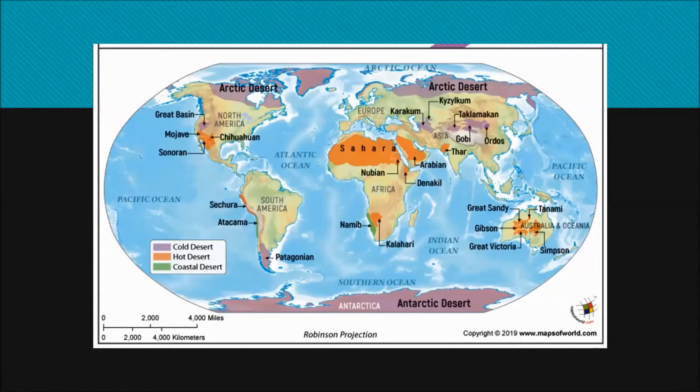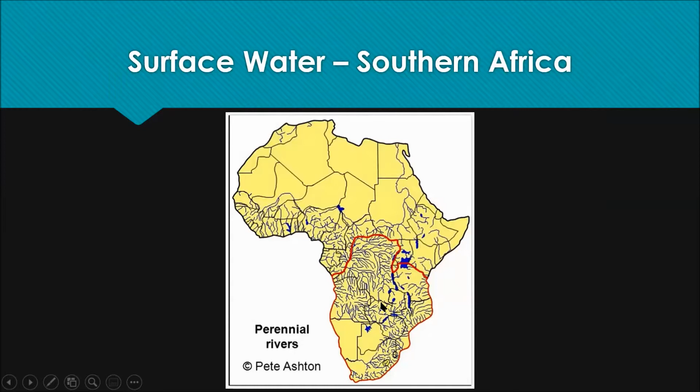Moving on to surface water, it's not surprising that despite Central Africa and much of East Africa being fraught with surface water, if you move to the west, Namibia is a blank spot with literally no perennial rivers inside its borders. If you zoom in to the city of Windhoek, roughly in the middle of the country, you find it's at the furthest possible spot from any available surface water.

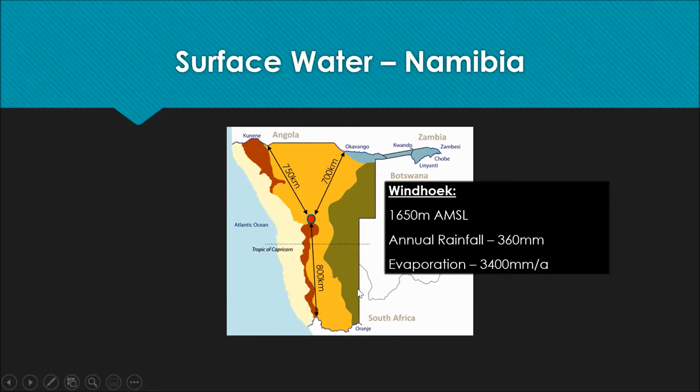So you have the Kunene River in the north on the border with Angola, the Okavango River shared between Namibia, Angola, and Zambia, and some other rivers further along, and then the Orange River in the south, shared with South Africa. That's just to put it a bit into context. So water supply in Namibia, and Windhoek particularly, is very, very challenging.

So if we go back in history to see why they considered direct potable reuse at that stage, this should tell you the story. It's called the post-World War II population explosion. In simple terms, the population of Windhoek was almost flatline, slowly growing, until around 1946. It really started rapidly expanding because of the establishment of government services in Windhoek and the decision to make it the administrative capital of the then Southwest Africa. That led to immense population growth, and soon they ran out of water sources.

By 1957, there was a period where they had to practice water rationing. As far as we know, it was the only time the capital city ever ran out of water and had to ration the people. That led to a crisis which was then taken up at government level.

As is usually the case, the government established a commission, the Executive Commission, to look into it. Their job was pretty simple: to see what the demand was at the moment and in the foreseeable future, review the available sources, and then investigate what additional sources they could bring online to solve the problem. And then, as with all government reports, it ends with how much that will cost.

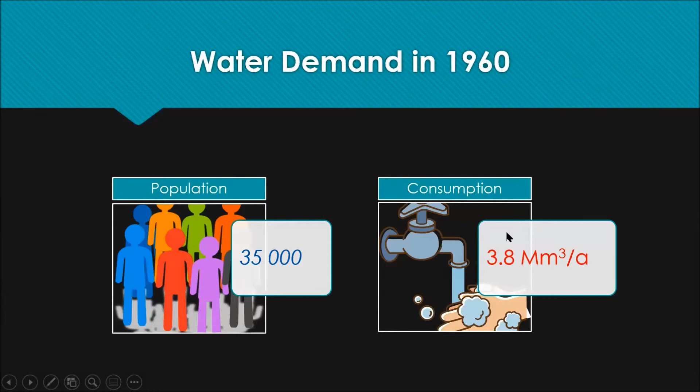So if you look at the situation then, they had about 35,000 people and needed about 4 million cubic meters per annum. What they had were three sources: two smallish dams, with capacities of 2.4 and 3.6, and the Goreangab Dam, which was just completed, brand new in 1959.

But the majority of the water was coming from the Windhoek Aquifer, from boreholes that they had drilled. The yield of the dams was 0.4 million, and the Goreangab Dam gave 0.8 to 1 million, totaling 1.4 million. What they needed was 3.8 million. So the surplus, or the bulk of it, came from the Windhoek Aquifer, even though the safe yield at that stage was estimated at about 1.6 million cubic meters. So they were massively overdrawing on the Windhoek Aquifer already at that stage.

So they looked at a number of options, and this is what the Executive Commission presented, also recognizing that the boreholes were already sorely overtaxed - a quote from the Executive Commission findings report. Options included water loss control, obviously an obvious one, and maximizing the use of the Avis Dam, likely because it's upstream of the town so they could gravitate water from there. They were also proposing an additional dam downstream of the Goreangab Dam, called the Gammams 3 Dam scheme.

And then they proposed the Swakop Dam, which would have been a state supply scheme some 70 kilometers north of Windhoek. And last but not least, an option proposed by the City Council of Windhoek: they were fairly confident that they could reuse treated sewage water and supply up to a third of the potable demand of the city.

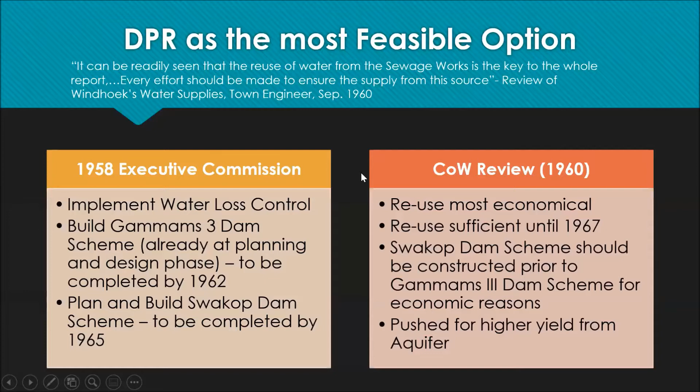So it was agreed, towards the end of 1960, that they would pursue direct potable reuse. Just a few comments on the early days.

They then brought in the Council for Scientific and Industrial Research, the CSIR in South Africa, who they had under contract in the early days to develop the scheme. They signed a new contract with a more focused approach, and did extensive pilot studies both here and in South Africa between 1962 and 1965.

That led to the design of the first full-scale plant, producing about 5,000 cubic meters per day, or 1.6 million cubic meters per annum.

Production then started in October 1968, and as you can see, it was just in time for another dry spell, because within the first year they managed to produce a quarter of the total supply to the town from this reuse plant.

The Swakop Dam scheme, interestingly, was only completed and started producing water about 5 to 6 years later. So this really gave them time to complete that bigger capital project and also justify the cost in terms of the number of users.

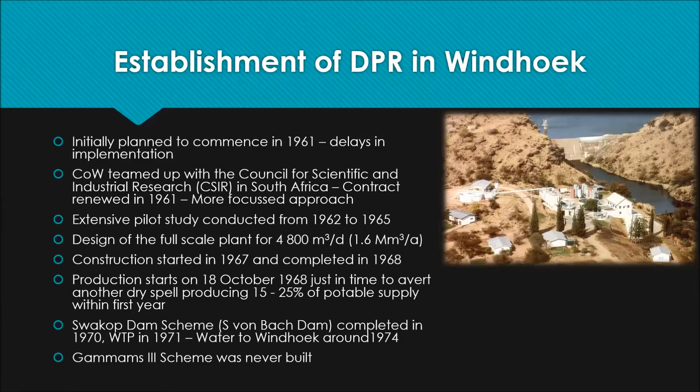The other interesting fact is that the Gammams 3 Dam scheme, which was actually the primary proposal from the government side, was never built - even up to this day.

Just some comments on the early days of DPR in Windhoek. Interestingly, the government was very hesitant to declare the Windhoek DPR plant as a normal supply source. It was only declassified as a research facility in 1982, which was 14 years after the initial supply started. They did keep a testing facility in Pretoria, South Africa.

It was called the Stander plant. During the first life of the Windhoek plant, they kept doing tests and improvements at the Stander plant, which after testing was then implemented in Windhoek as permanent solutions.

Also during that time, interesting to note, it shows maybe the distrust in the solution. Four different independent laboratories, two in Namibia and two in South Africa, were involved in monitoring the effluent from the plant to ensure compliance with the set standards.

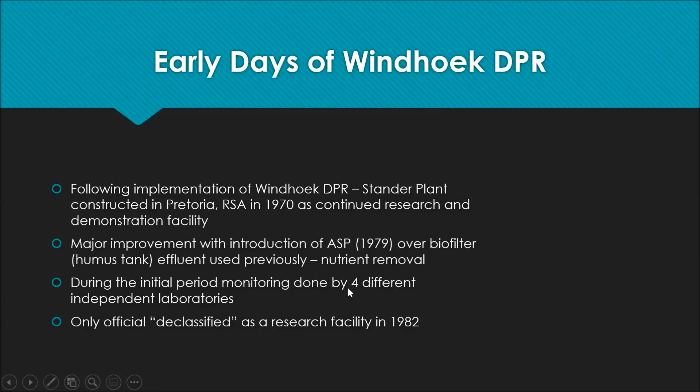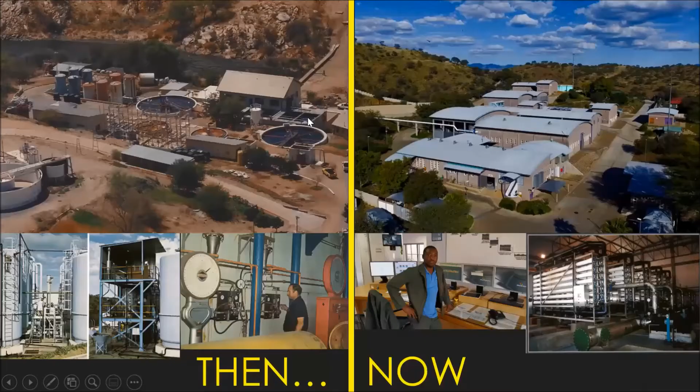Just some pictures on the left. You can see this is what the initial plant looked like. You can kind of see that they adjusted the old plant to meet the DPR requirements. On the right-hand side, you see the purpose-built new plant, which is not so new anymore - it's about 20 years old at the moment. But this is what it looks like, more modern with centralized automated control and including membranes and so forth, which was technology not available in the 1960s.

Just quickly on the process train - I don't know how many participants are technically inclined, but I'll quickly run through the process. So what you have is raw water blending. As I said, there were two sources: the Goreangab Dam and the sewage treatment plant. The Goreangab Dam in the last 20 years of the new plant was almost never used. So for the last at least 18 years, we have been using exclusively treated sewage water.

The first step is pre-ozonation, just to destabilize some of the organic material, and then also the introduction of ferric chloride, which is the main contributor to the next step of dissolved air flotation. After dissolved air flotation, there's chemical stabilization for the pH, followed by normal sand filtration. After sand filtration is really the main chemical treatment step, which is ozonation. After ozonation, there's removal of the residual ozone, because you're followed by a biological step - a BAC, biological activated carbon filtration, followed by GAC, granular activated carbon. Then the last step is ultrafiltration in the membranes, and then just normal water stabilization before supply to the town's residents.

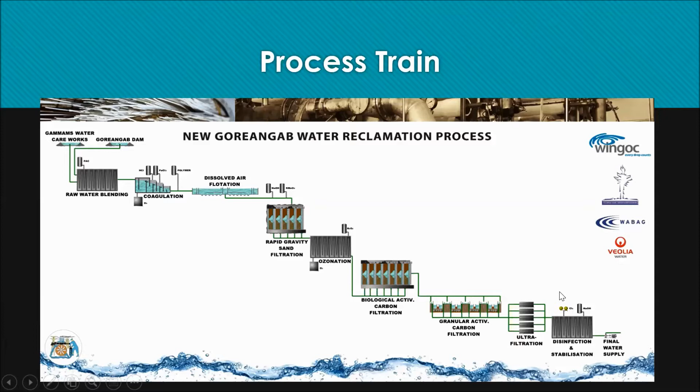Just some principles - I want to spend a few moments here. The first principle, and I would say the fundamental basis of the DPR in Windhoek, is that we only use wastewater from domestic origin. In the town, the drainage areas for industrial and domestic have been separated, with industrial draining to a separate plant. The water that goes to the plant that supplies the DPR option is purely domestic.

Then the monitoring is quite important. We call it whole cycle monitoring. It means that you monitor the whole cycle from the point of discharge, where somebody discharges wastewater into the sewer, back again to the point where you supply to that same site the treated water. You have to know what's happening in that entire cycle in order to really control the process. Effective biological treatment means your wastewater treatment has to be up to standard, because a consistent supply from there in terms of water quality is very important for the reuse process.

The multiple barrier treatment, I think, is well known in the DPR world today. It's just that there is more than one process that actually takes care of a specifically identified contaminant. Blending of the final effluent is something brought about due to the fact that we use direct pipe-to-pipe reuse. In an indirect process, you would have blended back into a natural source or a river where there would have been some dilution. Because we are not doing that, we take a one-third to two-thirds proportional dilution from surface water, from rainwater, from the surface water dams. So that's also quite an important cornerstone of the process.

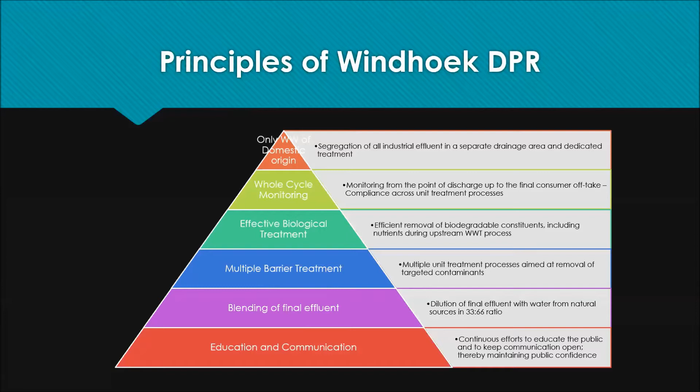And then last but not least is ongoing education and communication to the users. People need to know what you are doing, and they need to have trust in what you are doing. So you don't just win the trust once off. That leads us to sort of the public acceptance - how was it that people were accepting the fact that they were drinking their own treated sewage?

At the media conference, he was standing with a glass of water with the reporters. When asked why he kept referring to the glass but hadn't been seen drinking from it, he said, as a good politician would, to be honest with you, I already had my glass. He also mentioned they had a testing panel where people tested the water, and one sample was from the reuse plant. He said three-quarters of people actually preferred the treated sewage as the better tasting water. I don't know if that's true, but that was one of the motivations he gave in his speech.

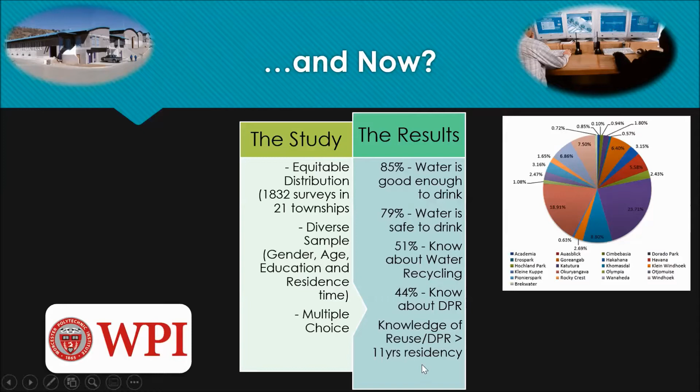It dropped a little bit from 85 to 79, but still the majority felt it was safe. But when asked if they knew that a third of their water actually comes from treated sewage water, it dropped to 50%. This shows that continuous public education is necessary, because people might know about it during a drought or when the solution is introduced, but many years later, people don't know. The study found that people who had a residency of 11 years or more at that time knew about the source of the water, but younger people, and people who hadn't gone through a drought—since 11 years was the time to the last drought—don't actually know.

So just some financial considerations. I don't know how I'm doing on time.

We are planning a new plant to be completed in the next 4 or 5 years. We're only at the pre-feasibility stage now, but we have done cost estimates based on what they did in Cape Town, because Cape Town is also currently looking at DPR options. The indications are that you're currently looking at just under $2 million per megaliter, so just to give you an indication of what current cost would be.

The OPEX, I took the operational cost of last year, the year 2020, and that was just under 5 million. That translated into about 90 US dollar cents per cubic meter. That's the price at which the water was sold to the public.

This cost obviously includes consumables and maintenance. There's quite a bit of reinvestment in the membranes, which have to be replaced in total, I think once every 7 years contractually. It also includes quite a lot of money going towards monitoring and research, because this plant, even though it's 20 years old, we are doing continuous research, because the world of science is evolving, and what people can measure becomes more and more, and also the level at which people can measure it.

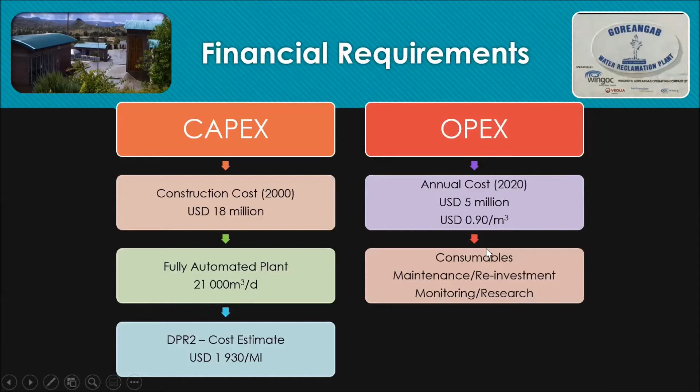Before it was okay if something was below 1 milligram per liter, but now you're looking at nanograms per liter, etc. So we have to continuously make sure that the plant meets all the new standards and all the new contaminants that are being identified as being of concern. There is an ongoing responsibility on anybody who implements such a solution to keep track of what's happening in the world of science.

Just as a last bit, what is the impact of this plant? How important is it to us as a city council? What you can see here is the water demand forecast that was done in 2012-13, and at the current rate, we were exceeding the available supply that we had.

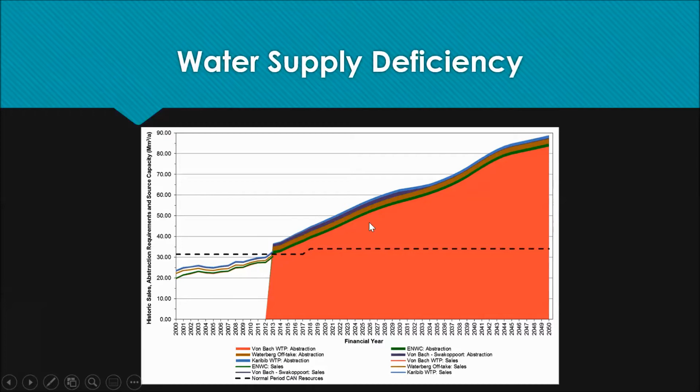What you see here was an upgrade to the plant, or actually a rectification of a problem we had, to try and get more water. But we were exceeding the available supply.

The options that we could identify at that time were long-term: taking water from the Okavango River, as I said previously, 700 kilometers away, or going for desalination at the coast, which is also about 350 kilometers away, but also more importantly, 2,000 meters lower down at sea level. These options were not going to be implemented in the foreseeable future, or at least 10 years to develop. So the city developed a water supply strategy, and the core of that was around reuse, both potable and non-potable.

Then we hit the drought in 2016. Before the drought, we had access to surface water, so 76%, or 3/4, of the water that we had came from surface water. We had to replace most of that as the dams nearly ran dry. 2 of the 3 main supply dams actually went dry.

So we had to up the DPR, and we had the option to double it at the time to about 30%. Since then, the DPR has been supplying the city with about a third, and that's how important it was. The rest was made up from groundwater on a temporary basis. If we didn't have the DPR option as a supply, we would have definitely had trouble, because there was a limit to what we could supply from the other sources. The actual surface water went down to just 3%.

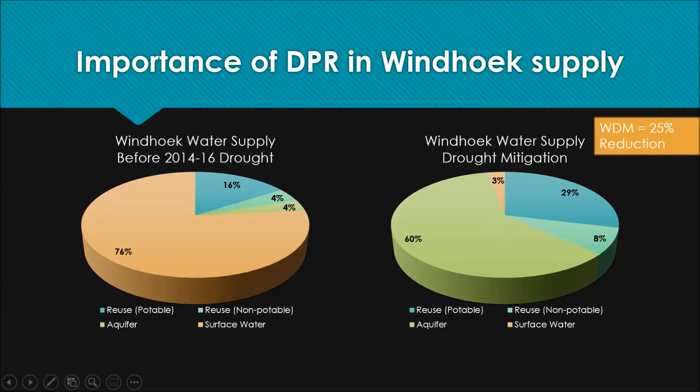So I think that's it from my side, Andre. Yeah, I hope it was fast enough and not too fast. Thank you very much.

Okay, thank you, Andre. Hello, everyone. My name is Sydney, as Andre has mentioned. It gives me great pleasure to introduce eThekwini to you guys and the projects that we're working on.

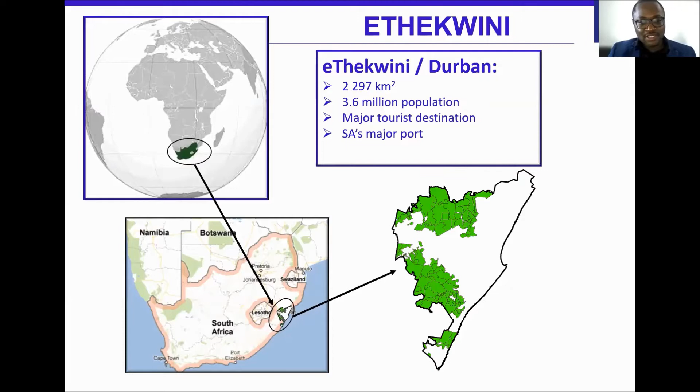Just to give you a brief background of the eThekwini municipality: it basically governs the city of Durban and the surrounding towns. According to the last census, we have a population of about 3.6 million people, increasing every year by about 1.5% per annum. We are a major port destination, one of the largest in Africa.

In terms of eThekwini Water and Sanitation, we supply about 963 megaliters a day from 9 treatment works. Those 9 treatment works are owned by our bulk water supplier, Umgeni Water, which supplies to us, and then we buy the bulk from the treatment works. We then reticulate it through our system, which has about 14,000 kilometers worth of water mains and a number of reservoirs. From that 963, we treat about 500 megaliters a day of wastewater from our 27 treatment works.

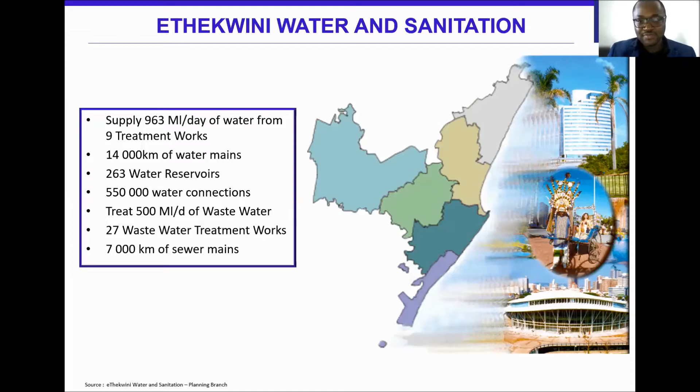So to give you perspective on the supply zones for eThekwini: eThekwini purchases its water from Umgeni Water, our main bulk supplier, who supply us from 3 main water supply systems. The biggest is the Mgeni water supply system, which has a number of dams. We're quite blessed in this region, with a number of rivers coming into the area, and this is the important one I'll be talking about, the central Mgeni system. The other systems in the north are still being developed, supporting smaller towns, including those in the south, but the major one is the Mgeni water supply system.

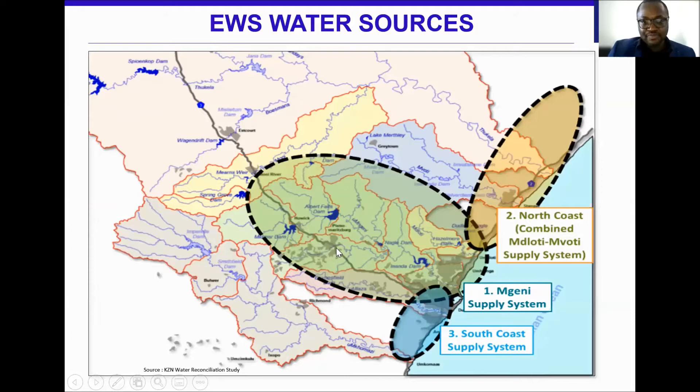So the National Department of Water and Sanitation proposed the Smithfield Dam to mitigate against that shortfall. That feasibility study was completed around 2012, 2013. The cost of it was quite considerable — nearly $2 billion in today's money.

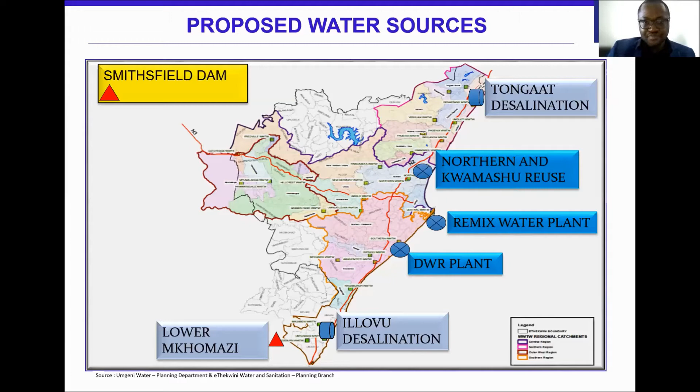So I'll briefly talk about these three main projects as well as our smaller supporting project. The first one was the Northern Works water reuse plant, for which we did a PPP feasibility study. This plant is located in the north of Durban, and we treat about 70 megaliters of wastewater in this treatment works. We envisage that we will treat the effluent and also supply industry in the area.

As you can see, NCP Alcohols is one of the industry players interested in taking the effluent, along with some of the golf courses and other users.

So the interesting part of this project is that we are also considering direct potable reuse in this area. However, this project started around 2014, but we had resistance from the public, particularly in this area, for religious reasons -- they didn't want to drink the water reuse water, and there was no public trust for the municipality undertaking such a project.

But that sentiment has since changed when the drought hit. We saw it in our other projects when we did public participation, where residents were actually encouraging the city to pursue this project because they said, look, there's a water shortage in the city and we need to do something about it. It's either no water or some water, so the idea of water reuse was supported going forward.

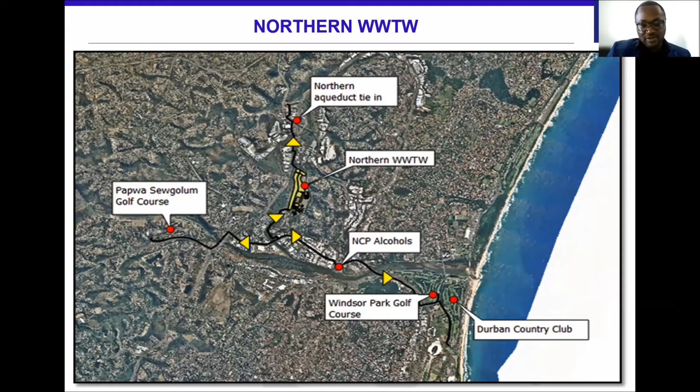So our other project was the Kwamashu Treatment Works. It's also slightly north of the project I spoke about. That will tie into our existing Northern Aqueduct, which supplies residents in the city of Durban.

But before we proceed with that bigger project, we thought let's pilot water reuse to get more support from the public and from the politicians, because it's very important to prove the concept to the public that it's safe to drink -- here are the results.

So we partnered with the Durban University of Technology to test some of the water, and CSIR as well. They'll be testing the effluent produced from this pilot plant at Kwamashu Treatment Works, to test reuse and a new wastewater treatment system called MABR, which is sort of an innovative one -- but that's a presentation on its own.

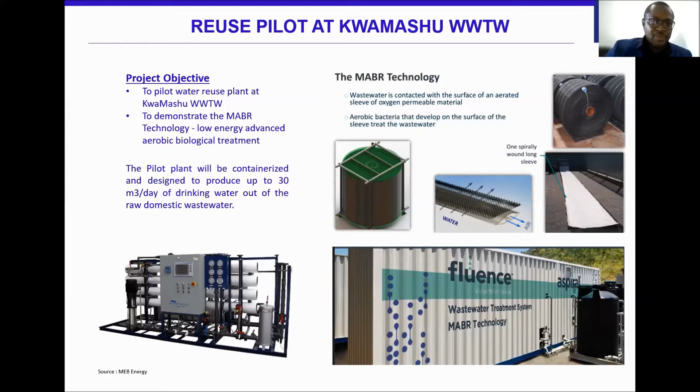The other project we were pursuing was stormwater and effluent reuse at our Umbilo treatment works. This is still at feasibility study stage, where there are a number of options -- we could inject directly back into the aquifer, or direct that effluent to a nearby water treatment plant. So that's still in the pre-feasibility stage. We're pursuing this as a PPP project, which requires a PPP feasibility study to be done.

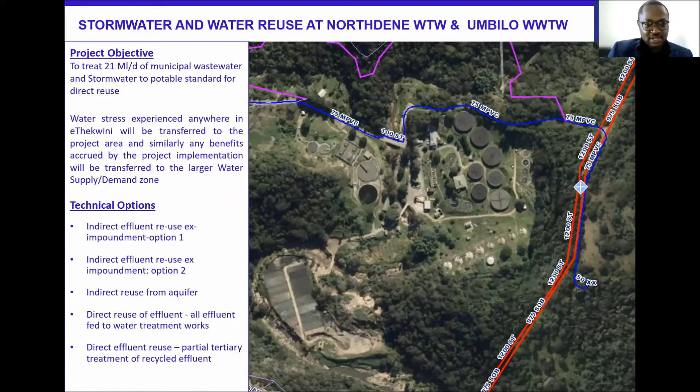As Andre mentioned in my introduction earlier, we have an existing plant called the Durban Water Recycling Plant. It was our first water reuse plant in the city of Durban, treating about 47.5 megaliters a day of treated effluent. This plant was commissioned in 2001.

So the main purpose of that plant was to supply industries in the south of Durban, near the old Durban International Airport where the industries were located. It was sited at our Southern Treatment Works, which is our biggest wastewater treatment works with a capacity of 230 megaliters a day. Veolia was appointed as a concessionaire to operate this plant.

We mainly supplied Mondi, a paper manufacturing company, and Sapref, an oil refinery. It was pretty successful, with no major outages and great water supply. We managed to supply 97% of the time to the industries, because we have a backup just in case we can't supply them with treated effluents, where they would tap off potable water from our normal mains.

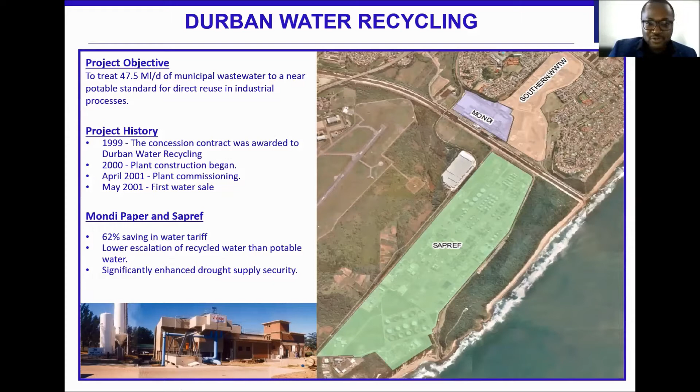In the past, we did consider desalination, but the challenges for us to pursue it were the high electricity consumption and the brine discharge, because there were concerns about the impacts of discharging high saline water back into the receiving water. The main concern was electricity consumption, since South Africa is having an energy crisis, and plugging in desalination plants would just worsen the situation.

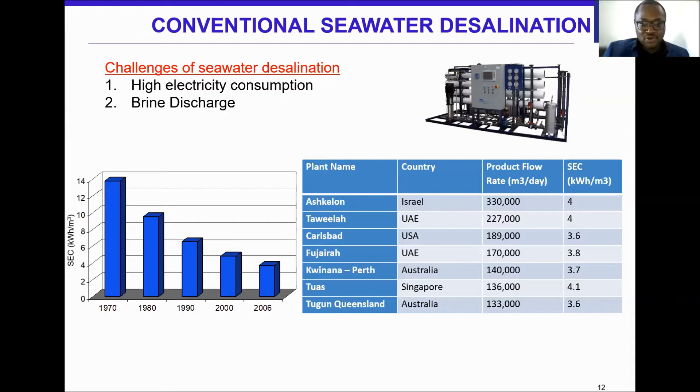So we couldn't really pursue desalination for those reasons, and the OPEX was a bit too high for us as a city. So we were approached by the Japanese government to implement a form of desalination - basically a mixture of treated sewage and desalination, where we take rejects from the BWRO, the brackish reverse osmosis, and use them to dilute the seawater.

By doing that, you're reducing the osmotic pressure, so your pressure pumps are spec'd lower. Because of the dilution effect, the brine you take out is about the same as you're taking in. So the attractive thing about this technology is that power consumption is considerably lower than normal desalination plants - normal desalination is about 3.8 kilowatt hours per cubic meter, while with this technology, maximum yield you'll see is about 2.6.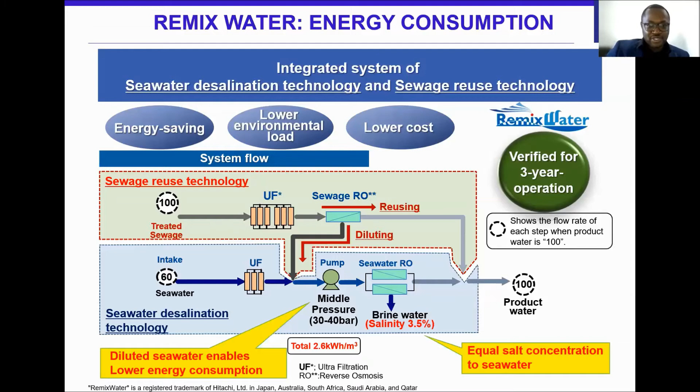This project was brought to us in about 2013 and introduced to the city. In 2016, we signed an MOU with NEDO, the public organization of the Japanese government, for them to fund a demonstration plant in the city of Durban to prove the concept of the technology.

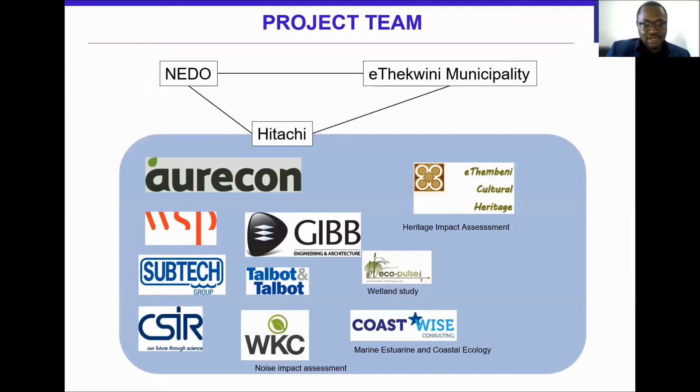It was for us to construct a 6.25 megaliter plant in the city of Durban and demonstrate it for a period of 12 months, to see if the technology is attractive and if the water quality produced is actually great for us. NEDO then appointed Hitachi to pursue this project, and a 3-party agreement was signed between these companies.

The harbor also has great water quality. I know the City of Cape Town in the past tried to implement desalination in the harbor, and there were issues with fuel oils from ships and other contaminants. But CSIR actually monitored the water quality for a period of 2 years and we saw that it's great - we even eliminated one of the units in the demonstration plant, the DAF, dissolved air flotation unit.

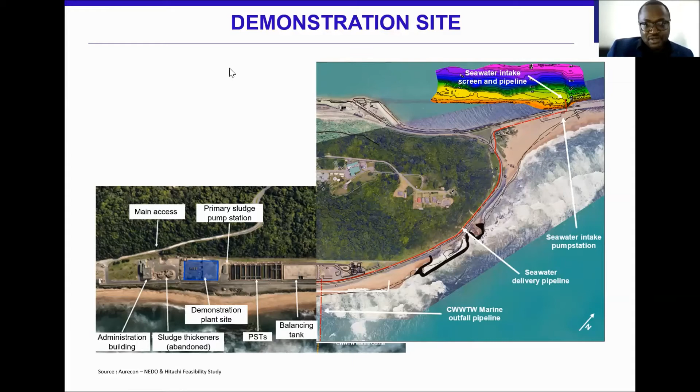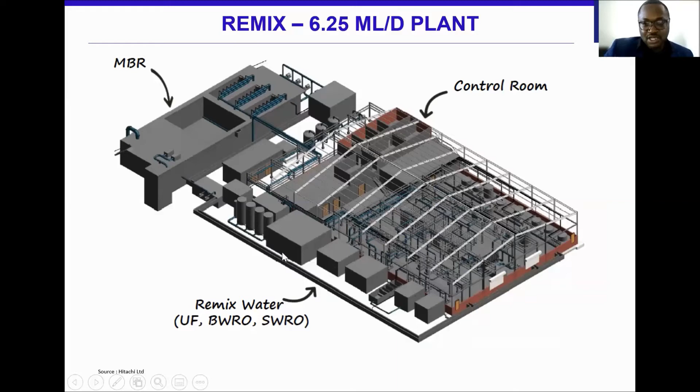So in terms of the project timeline, the plant was fully commissioned in about February 2020. But because of COVID regulations, we actually had to shut down the plant for quite a number of months because South Africa entered into severe lockdown restrictions, so we had to leave the site. However, the plant is busy being recommissioned at the moment. It should be fully commissioned in a month's time, and they will proceed with that demonstration period with the new revised timelines.

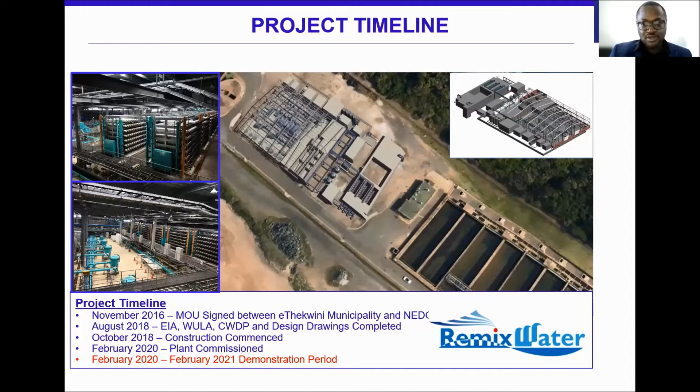So part of the larger projects we're looking at is the standards for water reuse. I'm sure, like my previous speaker mentioned, there are new emerging contaminants being found in our catchments. And then how do we detect and mitigate against those risks posed by contaminants like pharmaceuticals, viruses and pathogens present in the wastewater, and how do we remove them?

So that's when we partnered again with DUT and CSIR, who are assisting us currently with monitoring our catchments in the area. All of those different treatment works have different catchments, and hospitals and everything feeding into those treatment plants. We're actually monitoring the levels of these CECs in the wastewater, so that when some of our treatment plants are online, we can see the removal efficiency of those technologies, because it's different technologies on different sites.

And part of that study is also to revise the water quality standards ourselves, because the South African standards at the moment don't take into account water reuse. It's basically just raw water, freshwater abstraction, and that's about it. So it doesn't look in detail at the emerging contaminants of concern. Part of it is just to develop that new guideline for us to implement properly in our projects, and hopefully at national level it will be considered as well.

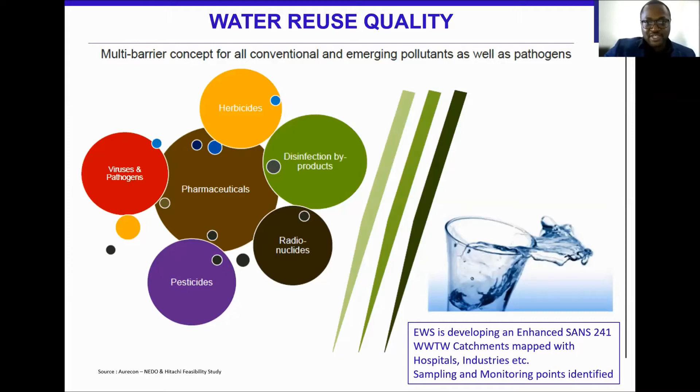So yeah, I think that wraps up my presentation. I think questions will take it from here. Thanks.

Thank you so much, Sydney. It is my feeling that at least southern Mozambique, or Maputo at least, has a lot to learn. It's not exactly Windhoek and it's not exactly Durban, but it has a lot to learn from both cases.

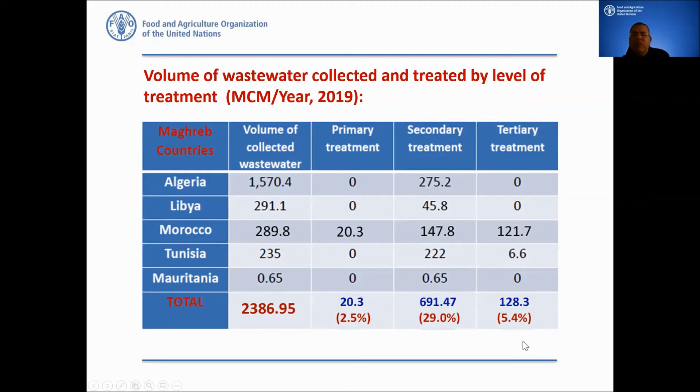Let's see now the volume of wastewater collected and treated by level of treatment. We have around 2.4 billion cubic meters of collected wastewater, and as secondary treatment we have around 30%, and around 5 to 6% at tertiary treatment.

For the reuse, we have at the region level, we are using only less than 10%, which is a very, very low rate of reuse. Let's see some examples from these countries.

For example, in Tunisia, the reuse of treated wastewater is mainly for agricultural irrigation, irrigating fruit trees, forage crops and cereals. We have golf course irrigation, landscape irrigation in urban areas, and some research and experiences for groundwater recharge. Actually around 3,000 hectares are irrigated, and the estimated potential is 4,000 hectares. So you see why the rate of reuse is very, very low.

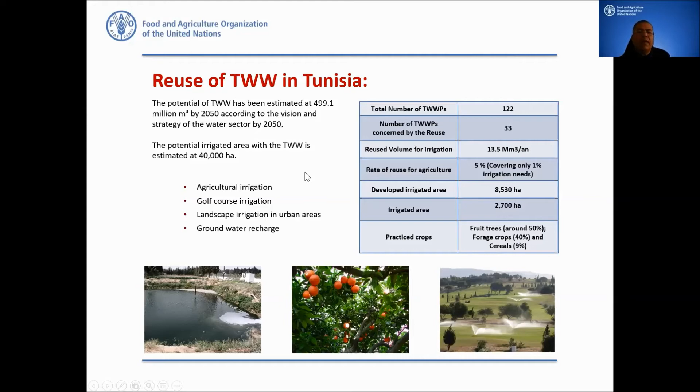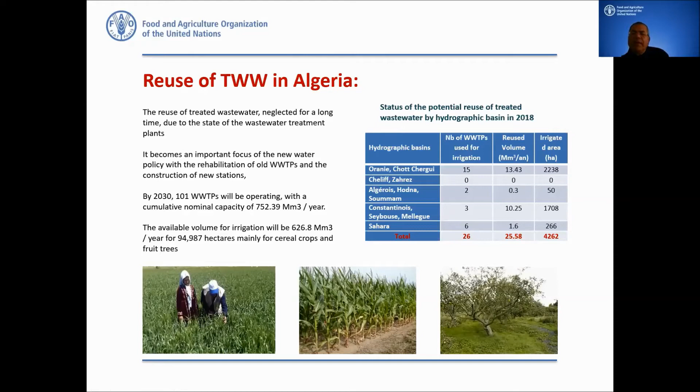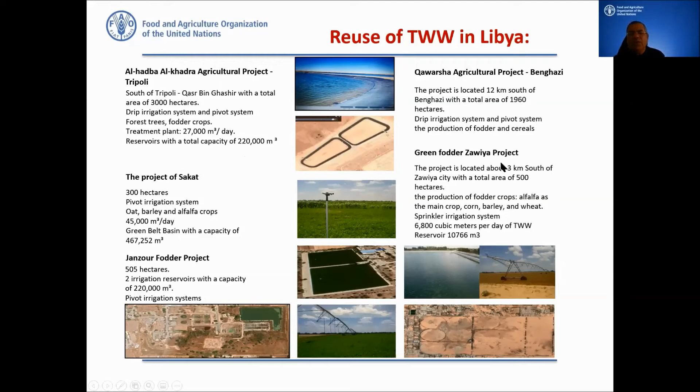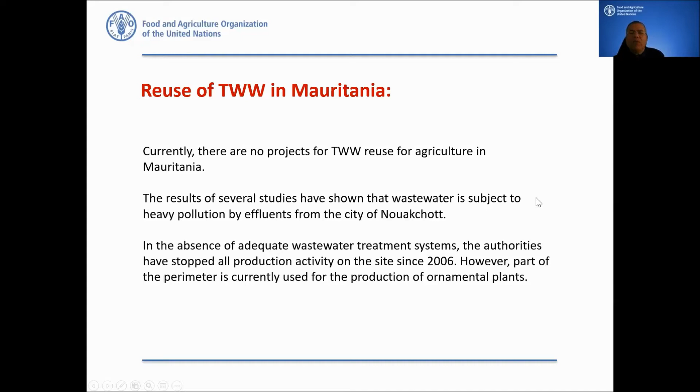Now I just presented the context, the challenges and the constraints to promote the reuse of treated wastewater. FAO, regarding this context, launched a regional project in these countries to unlock the potential of reuse of treated wastewater and drainage water. We focused mainly on treated wastewater and drainage water as two kinds of non-conventional water. The main objective of this project is to improve knowledge and information on the safe and sustainable reuse of treated wastewater and drainage water for agriculture development.

Quickly, I would like to share with you the FAO approach, what we did and what we implemented in this region. The objective is to improve and promote the reuse of these water resources. These are the 5 pillars of the approach. We start with the diagnostic and analysis, the state of the art, and the regional assessments.